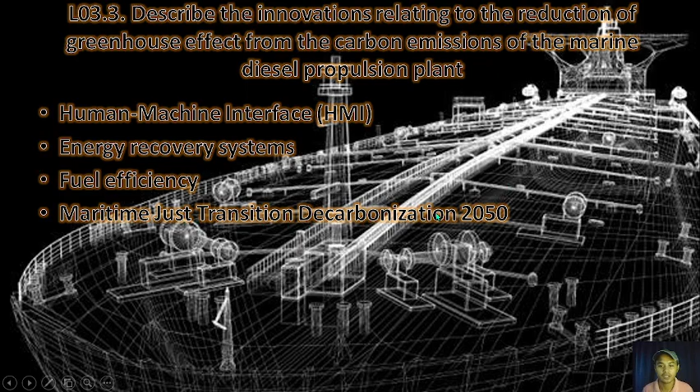Today we'll be discussing innovations. We will go with the fourth topic, Maritime Just Transition Decarbonization by 2050.

Okay, so as an engineer, a person who solves problems we didn't even know existed by using precision guesswork based on unreliable data provided by those of questionable knowledge. See also wizard and magician. Is this true?

Maybe. Okay, so let's go with the introduction to Maritime Just Transition Decarbonization by 2050. The Maritime Just Transition Decarbonization 2050 is a global initiative aimed at reducing carbon emissions in the shipping industry while ensuring a fair transition for workers, communities, and economies. It is driven by the IMO and the Paris Agreement, which target net zero emissions by 2050.

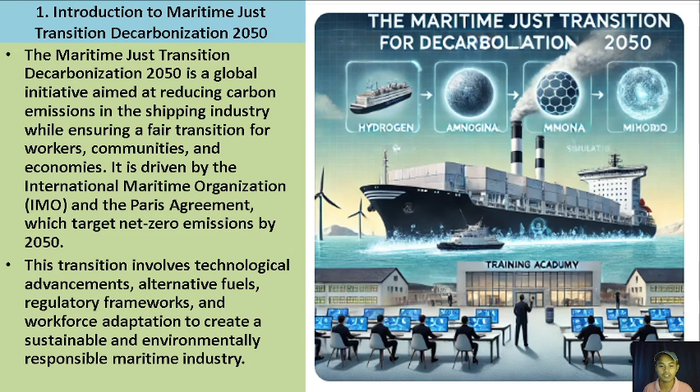This transition involves technological advancements, alternative fuels, regulatory frameworks, and workforce adaptation to create a sustainable and environmentally responsible maritime industry. Okay, so what are the key innovations for decarbonization 2050? We have, in principle, replacing conventional marine diesel with low emission or zero emission fuel. So we have here different types of alternative fuels.

We have liquefied natural gas (LNG), which reduces CO2 emissions by 25%, NOx by 85%, and eliminates SOx. Methanol and ammonia are emerging as carbon neutral solutions, with ammonia producing zero CO2. That's a very great alternative fuel. Next, hydrogen fuel cells enable zero emission propulsion utilizing renewable hydrogen. And the last one, biofuels derived from organic sources, reducing life cycle carbon emissions by 80%.

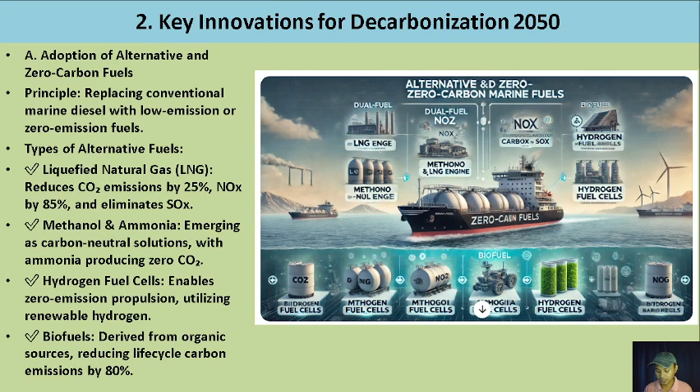So these are just some examples of the different types of alternative fuels that we can use for our decarbonization by 2050. Letter B, the next key innovation is electrification and hybrid propulsion. In principle, it uses battery, electric, or hybrid systems to reduce fuel consumption and emissions. As a benefit, it reduces greenhouse gas emissions during low-speed operations and in port.

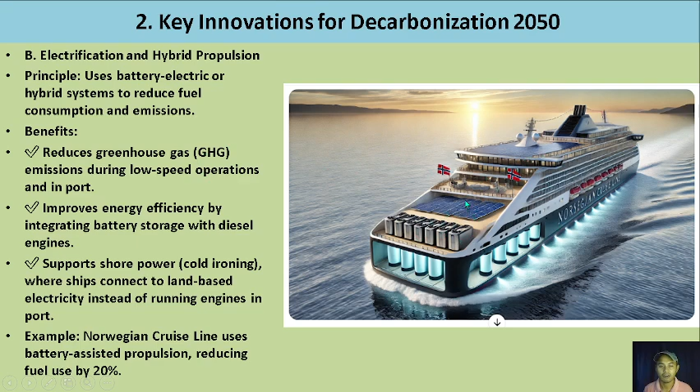It improves energy efficiency by integrating battery storage with diesel engines, and supports shore power, cold ironing, where ships connect to land-based electricity instead of running engines in port. For example, Norwegian Cruise Line uses battery-assisted propulsion, reducing fuel use by 20%. In the picture below, we have different hydrogen batteries and solar panels. These can all be used for electrification and hybrid propulsion.

Another key innovation for decarbonization 2050 is energy efficiency technologies. In principle, it's enhancing ship design and engine performance to lower energy consumption. So what are the different innovations? We have air lubrication. We have waste heat recovery systems, which convert exhaust heat into usable energy. This was also discussed in our previous topics.

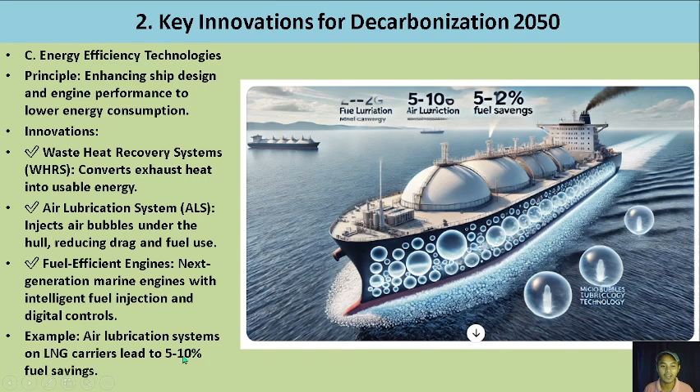We have the air lubrication system, ALS, where there is a bubble at the bottom of the ship. It injects air bubbles under the hull, reducing drag and fuel use. Next, fuel efficient engines: next generation marine engines with intelligent fuel injection and digital controls. Also putting new technology paint on our hulls. For example, air lubrication systems on LNG carriers lead to 5 to 10% fuel savings.

Another key innovation for decarbonization by 2050 is carbon capture and storage systems for ships, CCS. In principle, it captures CO2 emissions from exhaust gases and stores them to prevent atmospheric release. As benefits, it directly reduces carbon emissions from traditional diesel engines and can be integrated into existing vessel designs without full fuel conversion. For example, Mitsubishi Shipbuilding is developing onboard CCS systems for commercial use.

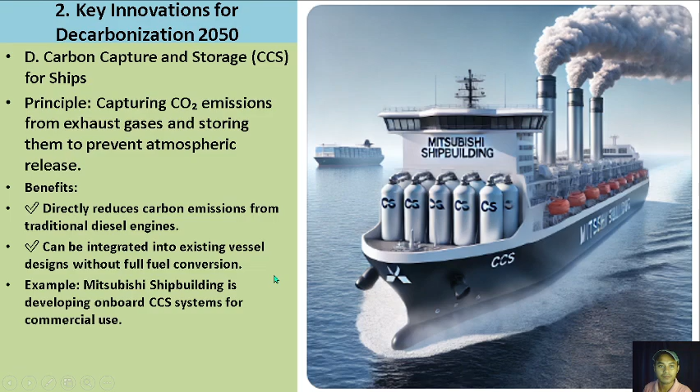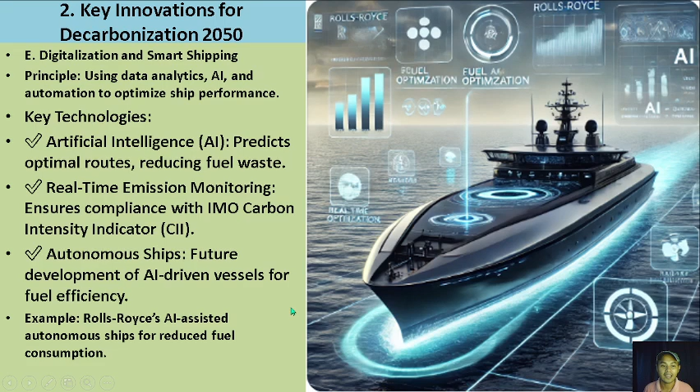Another key innovation is digitalization and smart shipping. In principle, using data analytics, AI, and automation to improve ship performance. Key technologies: AI, artificial intelligence, predicts optimal routes, reducing fuel waste. Real-time emission monitoring ensures compliance with the IMO Carbon Intensity Indicator (CII). Autonomous ships, the future development of AI-driven vessels for fuel efficiency. For example, Rolls-Royce's AI-assisted autonomous ships for reduced fuel consumption.

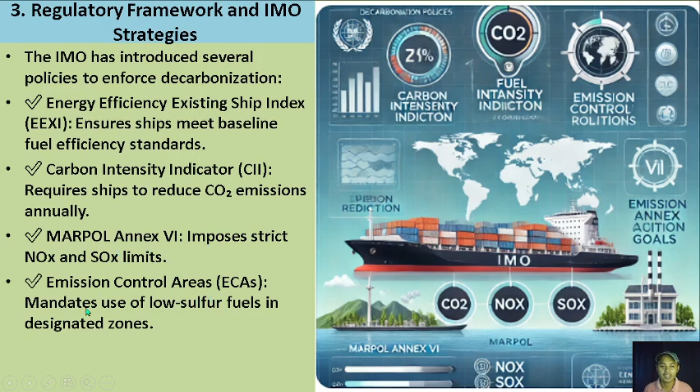Okay, what are the regulatory frameworks and IMO strategies? The IMO has introduced several policies to enforce decarbonization. We have the EEXI, Energy Efficiency Existing Ship Index, which ensures ships meet baseline fuel efficiency standards. The Carbon Intensity Indicator (CII) requires ships to reduce CO2 emissions annually. MARPOL Annex VI imposes strict NOx and SOx limits. Emission Control Areas (ECAs) mandate use of low sulfur fuels in designated zones.

Another regulatory framework: by 2050, the IMO aims for net zero greenhouse gas emissions from international shipping, an 80 to 90% reduction in fossil fuel use, and industry-wide adoption of zero carbon technologies.

So what are the impacts of maritime just transition on workforce and economy? Decarbonization affects not only technology but also the maritime workforce. The Just Transition Framework ensures that seafarers and industry workers adapt to new technologies without job losses or economic instability. There is training and upskilling: seafarers must learn new fuel handling techniques for LNG, ammonia, hydrogen, and digital ship management. Fair transition policies ensure developing nations benefit from the shift to green shipping. Investments in green ports support shore power, hydrogen fuel stations, and eco-friendly infrastructure.

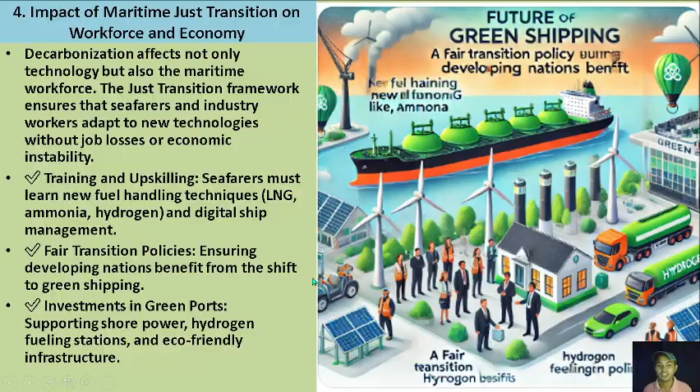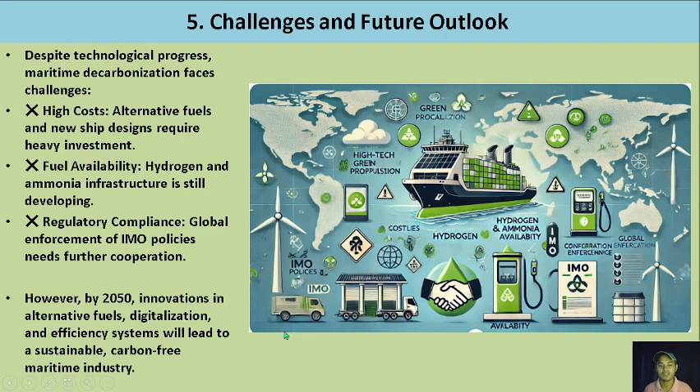Challenges and future outlook. Despite technological progress, maritime decarbonization faces challenges. First, high costs: alternative fuels and new ship designs require heavy investment. Fuel availability: hydrogen and ammonia infrastructure is still developing. And regulatory compliance: global enforcement of IMO policies needs further cooperation. However, by 2050, innovations in alternative fuels, digitalization, and efficiency systems will lead to a sustainable, carbon-free maritime industry.

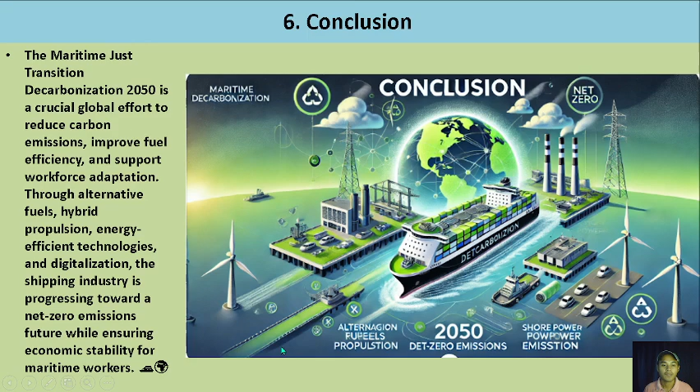In conclusion, the Maritime Just Transition Decarbonization by 2050 is a crucial global effort to reduce carbon emissions, improve fuel efficiency, and support workforce adaptation. Through alternative fuels, hybrid propulsion, energy-efficient technologies, and digitalization, the shipping industry is progressing toward a net zero emissions future while ensuring economic stability for maritime workers.